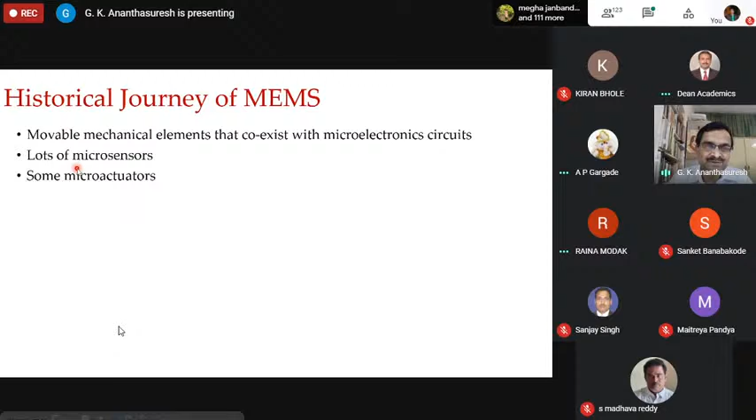Then we have actuators, micro actuators. These are not as many as microsensors. To make this point, in Microsoft Word, if you type microsensor as a single word, it doesn't complain. But type micro actuators, and it thinks it's a wrong spelling, wanting to split micro and actuators. That means micro actuators have not become as widely developed or used as microsensors.

And that's why I chose the topic of my presentation today on a micro actuator rather than a microsensor. There is also power MEMS, meaning you can generate power on the chip. So basically you can do many things on a chip today, and one of them is generating power. Also, there is this concept of metamaterials.

We all know materials - what are metamaterials? Metamaterials are those where, by design, if we control the microstructure or the hierarchical organization of a material, any single material you take can be turned into a metamaterial that has interesting properties. I'll give an example of that.

And then there is microfluidics. I'm sure you have talks on microfluidics today, as part of the course you have now. People talk about lab on a chip - the entire lab can be on a chip, and that is now well done. There are journals of this name and lots of work in this area.

Now people are actually talking about medical applications where you can have organ on a chip - lung cells, kidney cells, or heart cells on a chip. People also want to work on body on a chip now. Not that we'll have a human body on a chip, but all kinds of cells of the human body can be put on a chip so that we can actually create a body in a chip. So MEMS is not just mechanical and electronics today - there is so much of the other fields; you can do body on a chip.

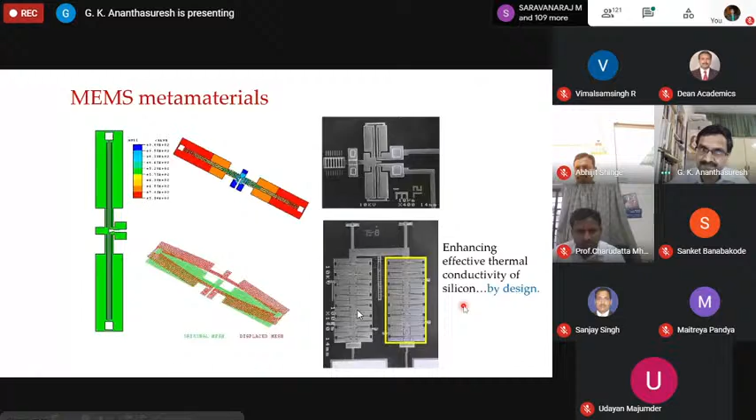Many material properties can be changed by design. And that's what a metamaterial is. You can take any single material and you can get properties of equivalent materials that are different from the base material just because of how you design the arrangement. And we also developed a lot of tools for probing biological cells. What you see here is actually a breast cancer cell, an MCF7 cell, which will be about 10-15 microns in diameter, and is being held with a micro gripper, as you can see.

This is an SU8 micro gripper, SU8 polymer. There's a glass pipette just to position it. And this one can actually grasp the cell, a single cell. And we do these measurements on single cells to assess various biological effects as well as disease states. And what you see in the bottom here is actually a zebrafish embryo being squeezed and released. We can measure viscoelastic behavior of the cells as well, static, viscoelastic and dynamic, all that we can do in a single cell.

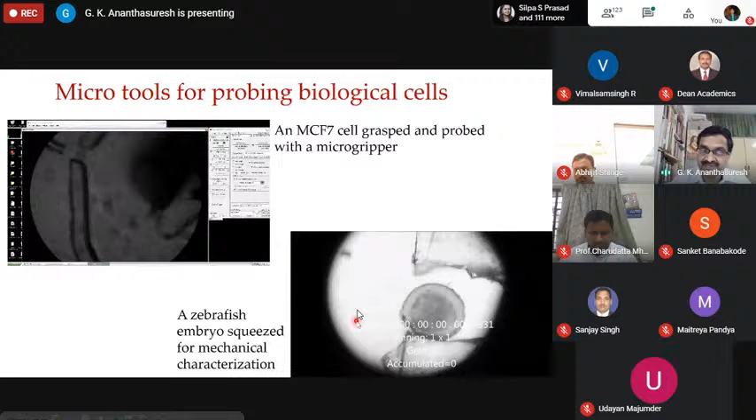And then we have also now these micro robots. Micro robots are not anything fancy. You just have a few appropriately shaped devices. Again, we are using SU8 polymer, and these are free floating ones. What you see here are the cells. These are fibroblasts. And these can be grown on these micro robots. And then this micro robot can be moved around.

What you see here are the coils, electromagnet coils. Electromagnetic force is also quite high compared to electrostatic force. Now people are moving towards magnetic actuation of micro robots. We have this array of coils and a chip, and these are the little robots that you see, different shaped robots. One of them I'm showing here, another one here, where biological cells can be grown on them, so we can shepherd the cells where we want and do lots of things. These are the ones that go inside the body and set up a hospital inside the body.

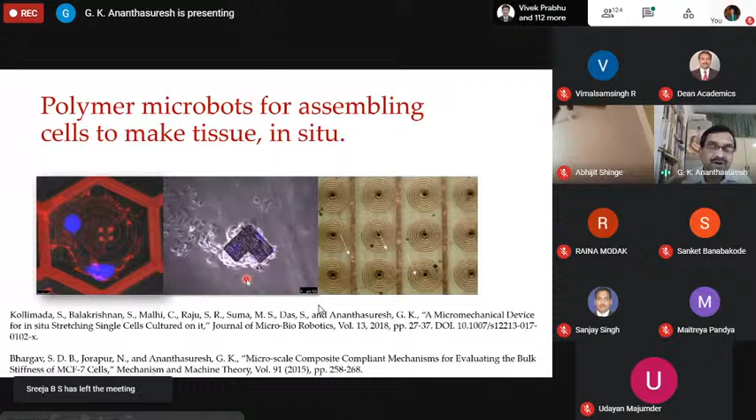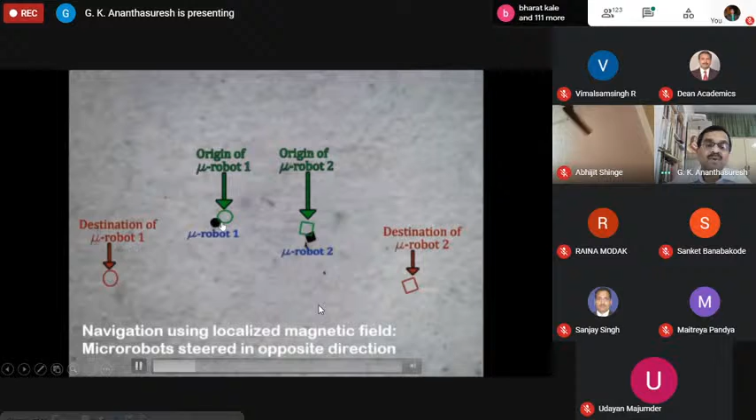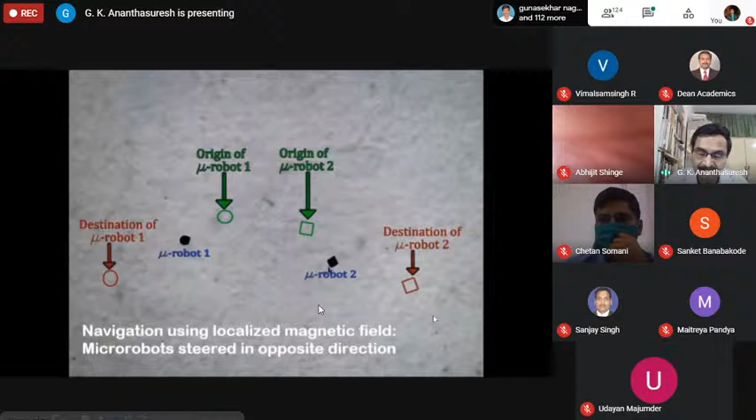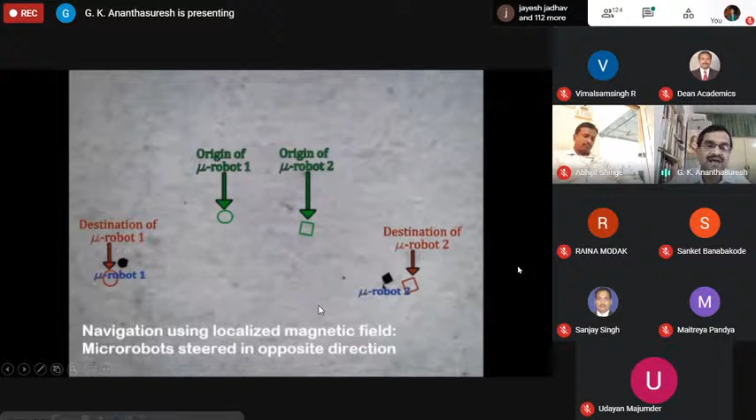And we also make what are called scaffolds for cells. Just like for a building, we have a scaffold. When you want to do tissue engineering or regenerative medicine, you provide a scaffold for the biological cells. And here we use micromechanical structures so that we can apply forces and measure forces that are being applied by the cells. Both of those we do. Our eventual goal is to assemble cells which are cultured on these micro robots and make tissue inside the body. There are applications where this is useful, and that is where we are trying to go.

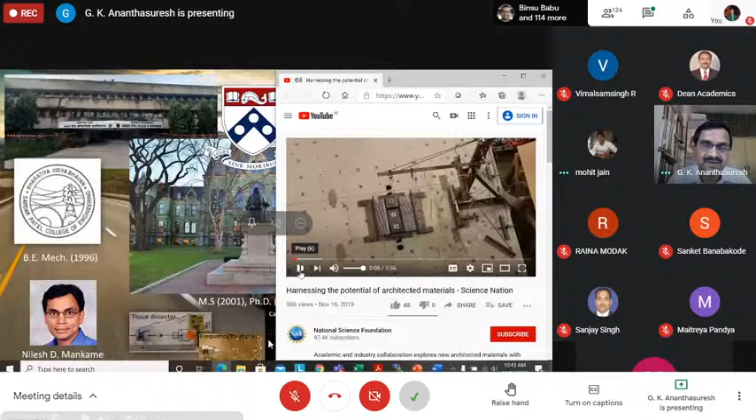Let me just go there. I hope you can tell me if you can hear the sound. Can you hear the sound from the video? No, sir. No. Okay, that doesn't come. But basically, I would like to play it, and then I will explain while it is happening.

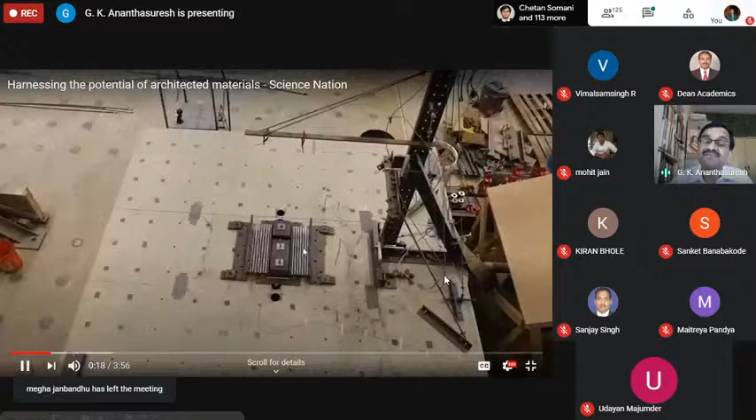So these are actually metamaterials. They're normal materials, but now you have some structure in them, and they behave differently from the original material. This is based on honeycomb structures, and this is the work of Nilesh Mankame when he was working with the professor at University of Pennsylvania. And Nilesh also will come in a minute, so you can see how he looks now. So this is Nilesh Mankame.

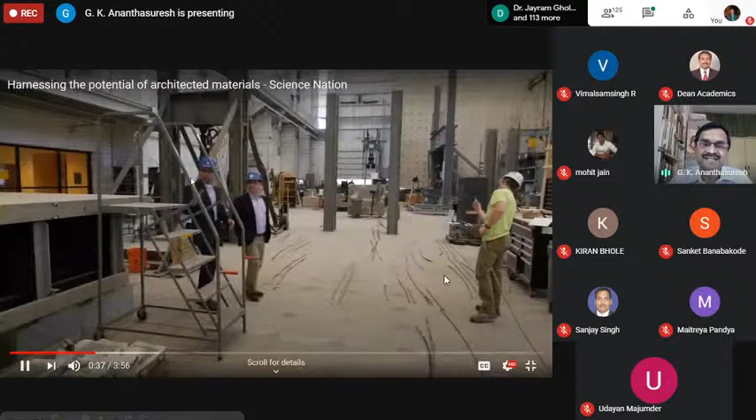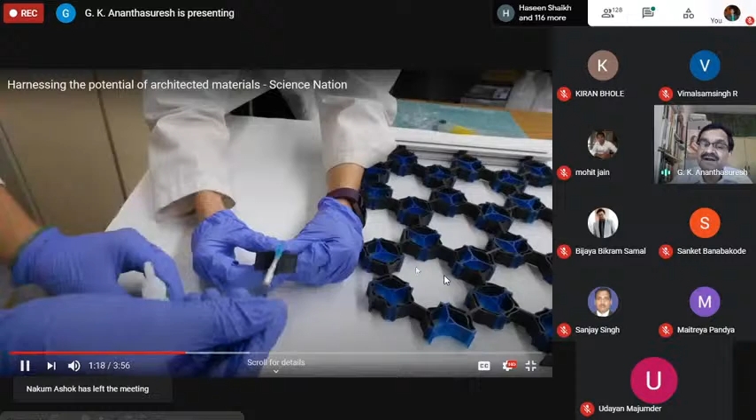So this is for energy absorption, and you can see this metamaterial when Nilesh explains. There are a lot of applications, automotive, aerospace, and this is Nilesh Mankame explaining to us what he has done with these metamaterials. So you can see the structure of these things, right? And they have different properties. Now you can do that at MEMS scale very easily and create the things that you want.

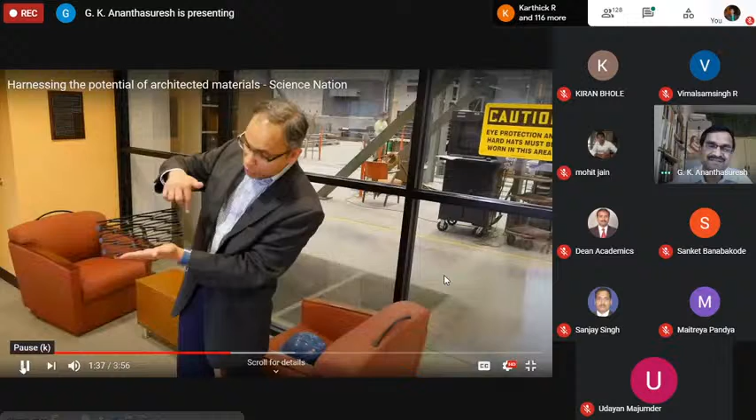So I'll stop here. Yeah, you look at that. Again, that is Nilesh Mankame. And that is bistable, you see? He presses it, and then that goes to the other state. He presses it again. Yeah, that stays there, right? So let me stop it here and go back to my presentation.

So if there are students, I think we should be inspired by what Dr. Nilesh Mankame has accomplished. And there are many more things that he has done. Now, let me move ahead and explain the last bit that Nilesh showed, which is this bistability. As you can see, bistability is all around us, in a hair clip, binder clip, some bottle caps and eyeglass frames; everywhere we have bistable things. And you can use them at MEMS scale, which is what we have done. That's why I chose this.

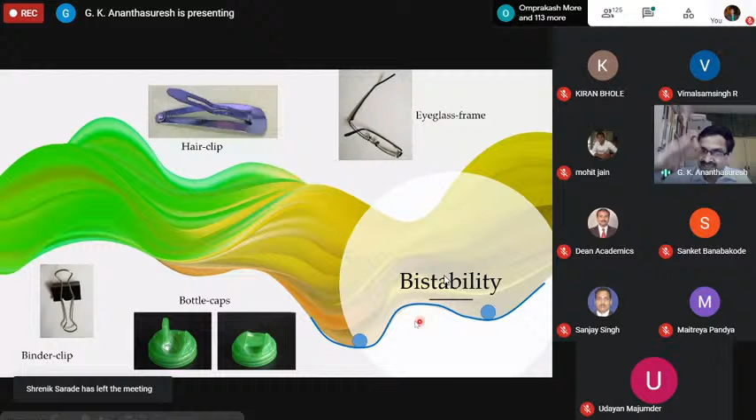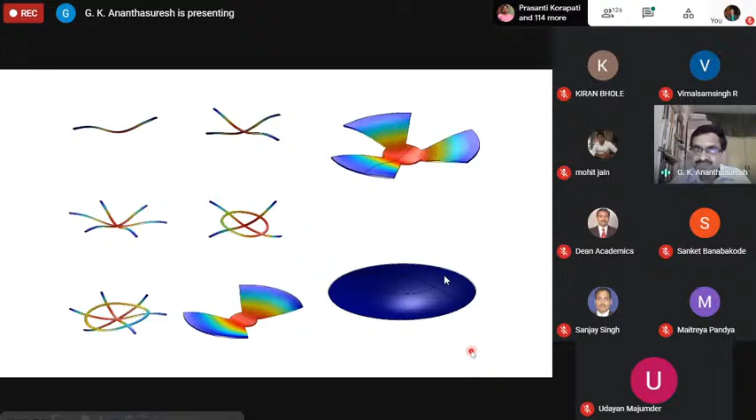And what is bistability? If you look at the energy landscape, like it is shown here, if there is a minimum here, there are two stable states. If this is potential energy or free energy, in between there is a maximum, which is an unstable state. And that's what Nilesh was showing with his hands when he presses. Now, here are various ways. You have bistable arches, a single arch, two arches, three arches, and then a ring, and something else, and the shells also. So you can use this bistability, which is highly nonlinear behavior, to do useful things.

And just to look at what is bistability, I said energy has two valleys and a hill in between. This is potential energy. If I take the derivative of this, then you get the force, right? Wherever this is minimum, force will be 0. At the maximum also, force is 0. At the minimum, again, force is 0. In between, you get this kind of behavior. As the displacement increases, force goes up and comes down. Whenever force-displacement has a negative slope, that is an indication of either snap-through or bistability.

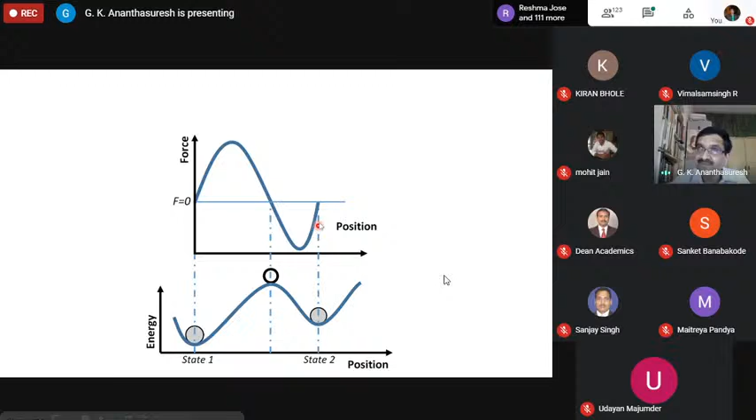Snap-through: we are pushing, and it itself goes farther. You don't have to do anything. That is the negative spring, so to speak. Positive slope is a positive spring, negative slope is a negative spring. That is, we are pushing, and it will not resist your push, but go in the same direction. That's what happens in between, and then it goes negative sometimes, and then comes back to the 0 position. And this is the nature of bistable structures.

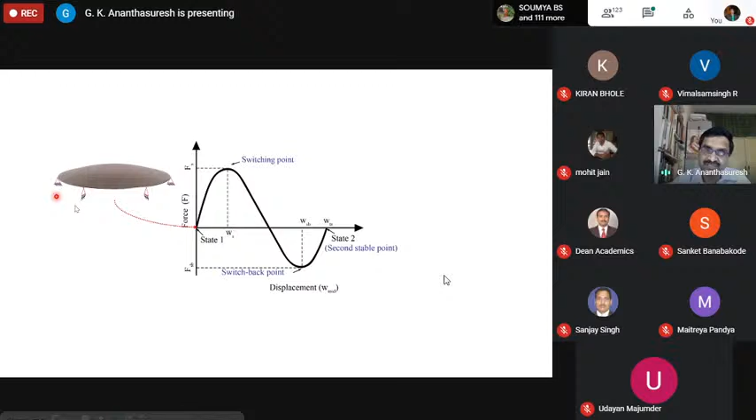And just to illustrate, you're starting here. Let's say I take a circular shell which is hinged at the edge. As you start applying force, there'll be a point where it starts deforming. There'll be a switching point. After that, even if you push, it won't stay with you. It will go by itself. That is, it enters the negative stiffness region here. And this is the negative stiffness. You are doing that, and it just wants to go.

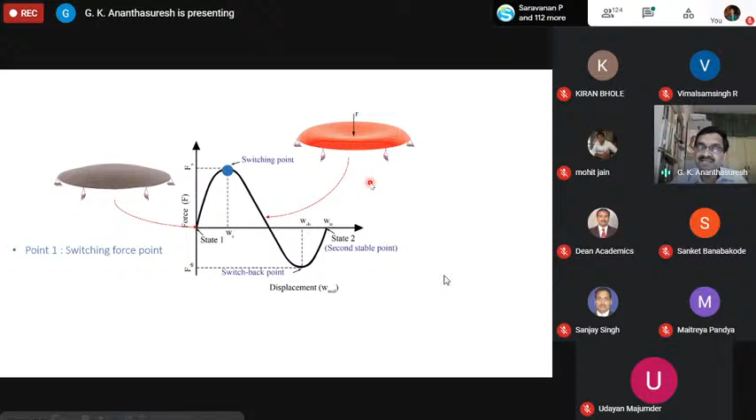Everybody has experience with shells. If you press, it'll resist. And after a while, it will go by itself to the other state. And that's what happens at the other switchback point when you're coming back. And what was concave up becomes concave down. That is the bistability.

And there are a lot of parameters. What is the switching force? What is the switchback force? How much does it travel from here to there? What is this force? What is this force? All of those. And where does it actually become unstable? All these are parameters you can control in designing these bistable elements, either arches or shells.

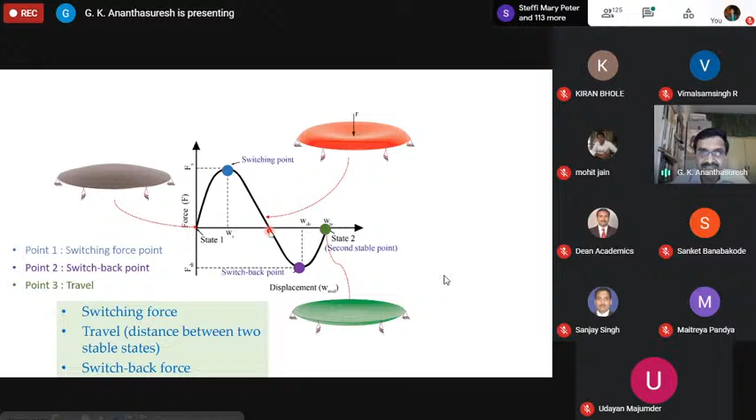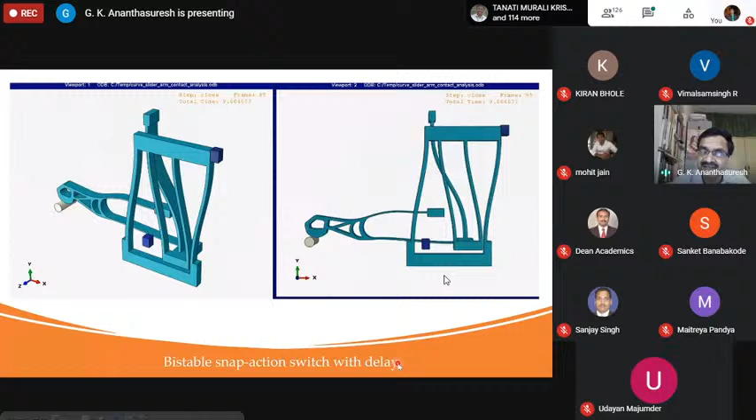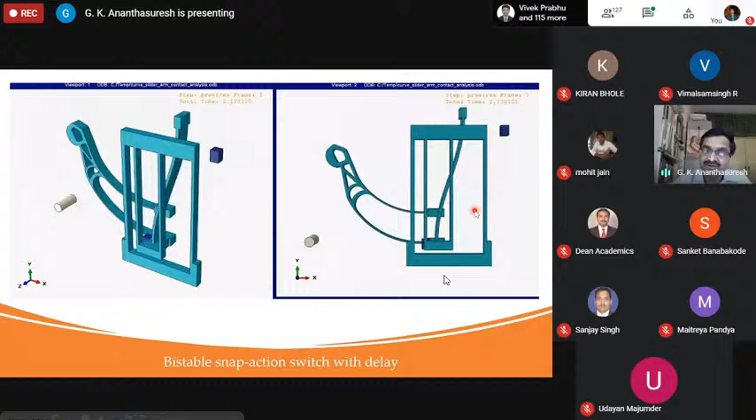So mechanically, you can create a delay and create very unusual nonlinear behavior for these things. This is an MCB, miniature circuit breaker, but just an example of what can be done with what we call compliant mechanisms. They don't have joints. Everything is elastically flexible. It is strong. You don't have to worry about things breaking because we keep the stress low enough in these designs. So now let me come to the electrothermal bistable switch that I would like to describe to you.

A little background. Where do we need this? In terms of microactuators, RF switches are something that are very widely researched, and there's a lot of work that's going on. And in fact, their performance is actually meeting the requirement that they'll be commercially used as well. In fact, some of them are already used in some devices. So here you need switching speed to be very quick and frequent.

If that is the case, using thermal actuation might not be good. Then you need electrostatic, which can go to gigahertz frequency of operation. But then force will not be much to make a good contact with the switch. If it is milliseconds or slower, you can use electrothermal. And there are usually cantilever type of switches. If you have an electrostatic actuator, let's say, it attracts and it will come and close the switch.

But then we thought that there will be some applications. In fact, there is redundancy selection in antennas where your need to switch between on and off is not frequent. Only once in a while you have to do that. So if we were to actuate to keep the switch in the on position, then you are actually consuming a lot of power. So if you only need it once in a while, it's better to use the bistable design.

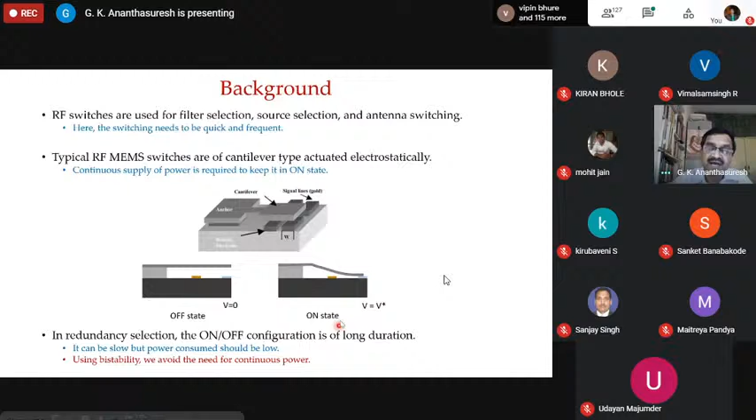That is, only to switch from one state to the other state, you need power. After that, you don't need power. So you don't need to provide power continuously. And that's a bistable switch that I'm going to talk about. So this was funded by ISRO. So these are the specifications that they had given to us, how to make this switch.

And in terms of RF behavior, I'm not a specialist. I'm a mechanical engineer. I work with people who know, Professor KJ Vinoy in IISc, also Dr. MS Giridhar at LEOS. So they do the RF modeling. And also one professor from Madurai, Professor Kantamani, is actually doing this for her work as well. I'll come to that at the end.

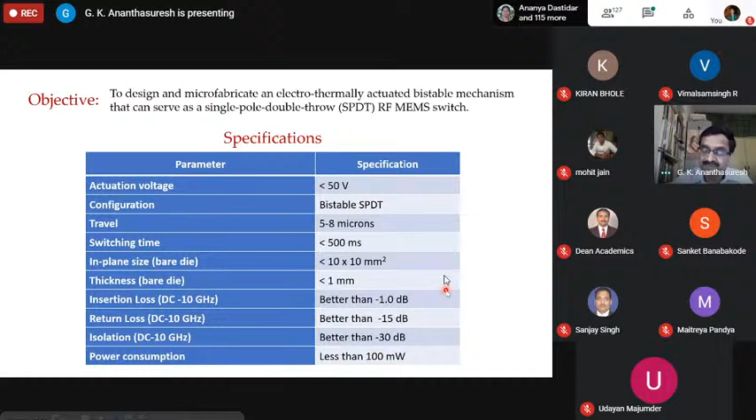So what we'd like to do is actually focus on the design now. It's bistable, also bimodal. I'll explain what that means. And then how to integrate the electrothermal actuators, and fabrication. I'm not going to go into details because fabrication today is accessible to everybody in a way, in India too. I'll come to that again at the very end of the talk. And then some testing that we have done. RF characterization is done only preliminarily because it's an ongoing work.

And we did a comparison of our switch with others. Most people today, when they make these switches, use electrothermal actuators because they have larger force, and there are applications where the slowness of operation is not going to come in the way. And within that, there are two types of electrothermal actuators.

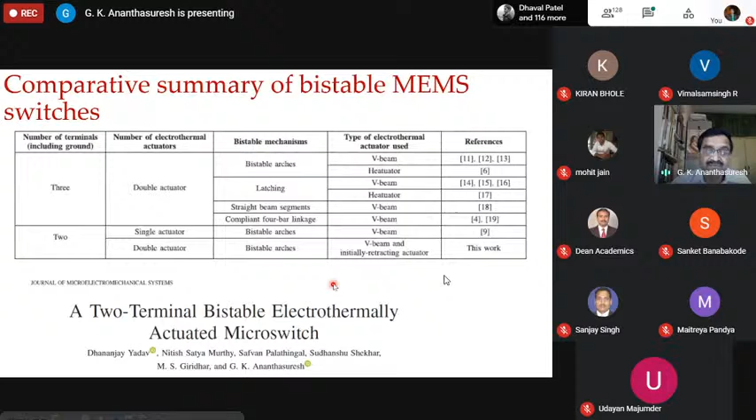One is the V-beam, the other is what is called a heatuator. The heatuator is the folded beam that I had flashed at the very beginning. The V-beam is the one that I'll be talking about a lot, so I will not explain that now. So many people use the V-beam, as it's very simple and can be very effectively integrated with the devices.

It's like those lights, when you pull a cord, they'll turn on. You pull again, it will be turned off, right? In a similar way, the same two terminals, you apply voltage, it will turn on. You apply voltage again, it will turn off. Only thing is the duration of the pulse, you need to change a little bit.

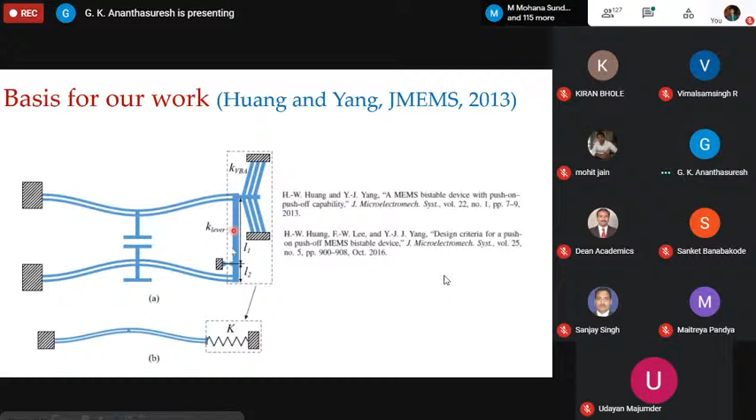It looked very interesting, but their design was very, very far from being robust. That is, when we took this design from this paper and tried to simulate it, it was just not switching. So we thought we should work on it, and the problem was this particular lever that they have was not strong enough or was not doing the intended job to make it robust to manufacturing tolerances.

We're starting with that. We used our ability to design bistable arches and came up with a design that looks like this. In the process, we had to come up with a new kind of actuator, which we called initially retracting actuator. That is, instead of just going forward like this, it will initially go back and then move forward. And there is a reason for it, as I'll explain.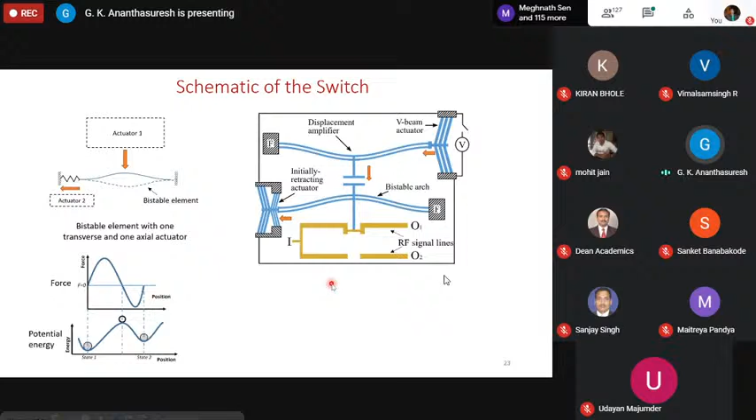So our switch design is basically you have 3 terminals, but actuator 1 and actuator 2 will have the same thing, that is ground and one potential. A normal 3 terminal would have 2 different things. Even though we have 2 actuators here, we have only 2 terminals. This and this will be at one potential, this and this will be the other potential. And that's how we do 2 terminal.

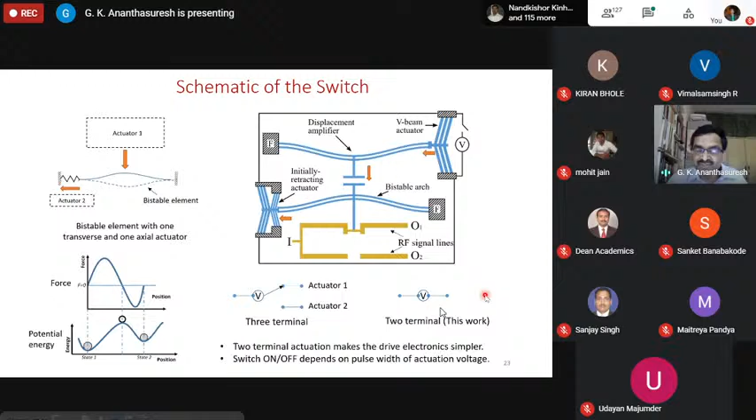It makes the power electronics circuitry easy. That's what our ISRO team, LEOS people told us, and that's why we moved ahead with 2 terminal design. How does it work? There is... use that as an amplifier. That is, displacement is small, but force is high that comes here. That will close this gap and push this arch. And that arch will go to the other state, as we'll see now.

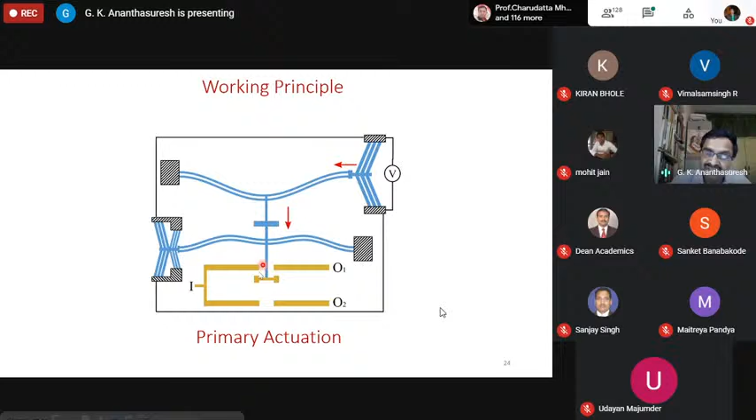So now you see, I'm applying force over here by closing this switch. Okay. Now that pushes this, and now this started pushing. So we break that RF transmission that is shown here with the dashed line. Of course, I'm showing slowly, but it will happen dynamically in the switch. The next step is this arch actually will switch, because we have designed it in such a way that when it is pushed here, because of the negative stiffness that it has, afterward it goes by itself to the other state and stays there.

Now the switch is off again, right? So watch again, I'm closing the switch, it pushes and goes, switch is off, no more power consumed, and now I'm closing another RF line. There's a switching between that line or this line. Now it stays there, okay?

Now if I want to remove it, I apply voltage, the same thing again, this one and this one. Now this starts going initially that way, retracting. So this actually comes back, and then that actually moves forward. That helps it to switch back and come this way.

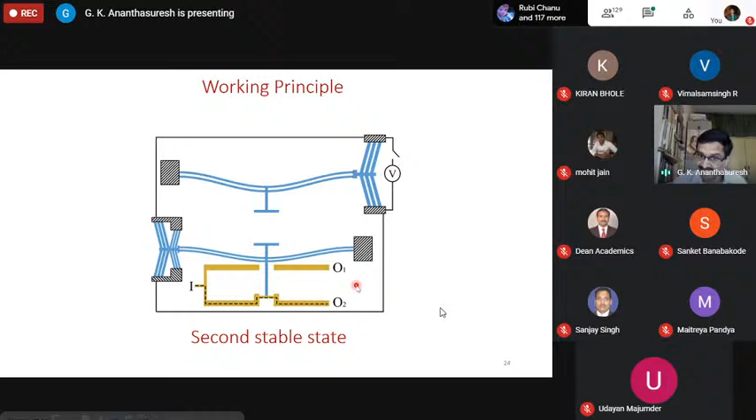Let me play this again. So initially it is here. We actuate that, it moves down and goes back, stays there. Now I apply voltage again, and then it comes back. I can switch back and forth by applying the same voltage but different durations. And how do you design this amplifying arch, this bistable arch? And there is an electrothermal actuator here, a special kind of electrothermal actuator. All of them together give you this behavior.

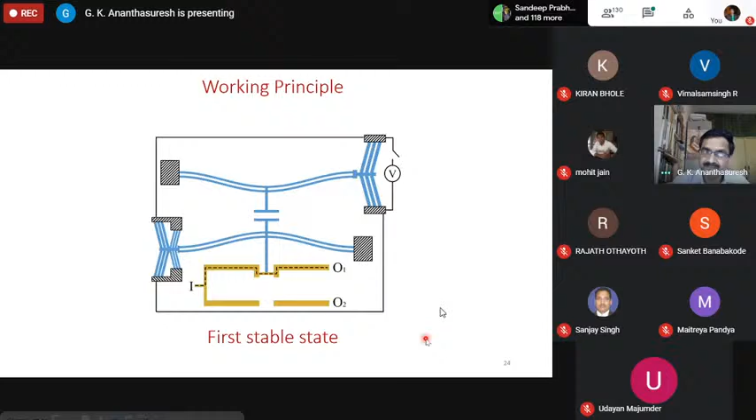So first of all, I said we need a new kind of actuator here. There is this heatuator, as I called it before. It can be a V-beam actuator. The V is this way, a sleeping V. This is a heatuator. So when we want to switch it from here to there, this one should not move in this direction. When it moves in this direction, this will not be able to switch to the other side. Okay.

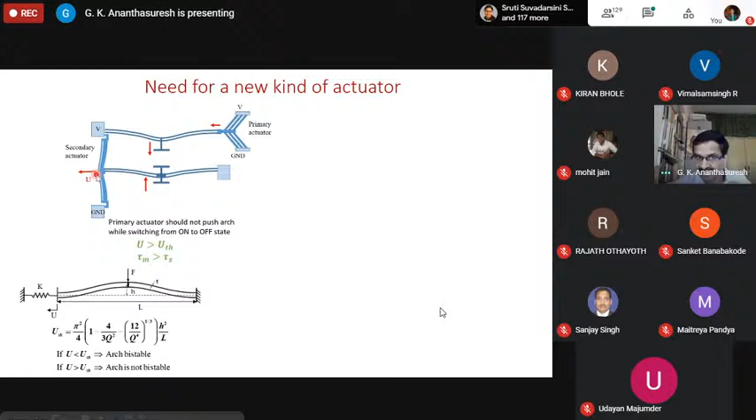On the other hand, when it is already there, you want it to actually go that side a little bit initially so that you can pull it back to this side. So we need an actuator that moves back and then comes forward, all in one thing. And that's what I think we have been able to do here.

So normally this heatuator, when you apply voltage between these two, you bend that way. Similarly, if you have a V-beam actuator, when this is at potential V and this is at ground potential, current will go through, causing ohmic heating to expand. This point will go that way.

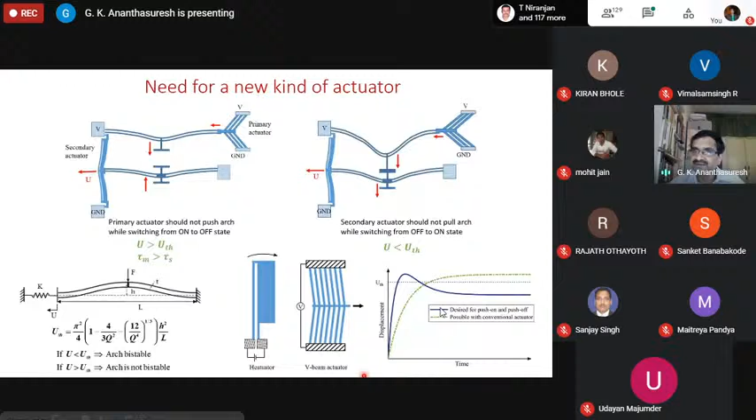Now what we want is something that goes in one direction and then comes back, goes back and comes forward. That's the behavior we want over here, and we try to do that. In other words, as time goes, it's a dynamic behavior, initially retracting.

So this one goes that side, whereas this one, because of the angle of this V-beam, moves this side. But then this is shorter compared to this, the length of these individual elements in the V-beam actuator. So there is less resistance for this, and current actually goes through this and it heats up faster than this in terms of response. That's why initially this will go that way.

But afterward, the force in these things is much higher than the force in this. It will start going that way. That is, initially it will go down. This is the displacement, this is the time. Initially it goes down and then catches up and then goes forward.

Or we can design them in such a way that it can go back and then come forward and not go beyond the original state, or can go back and come a little bit and still stay back, right? So these things, initially at t equal to 0, if it is here, up to some tau in between, it will actually go back, as you can see here.

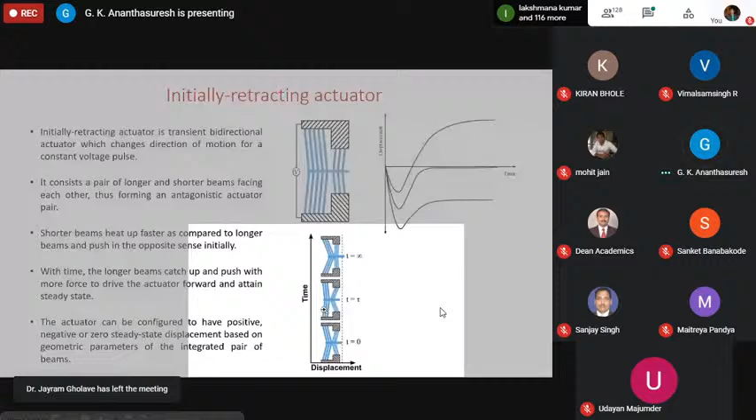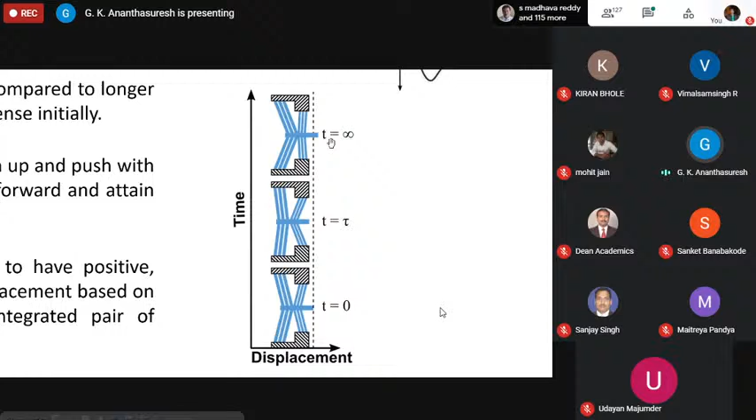Yeah, see, initially it is here. When I just actuate, in that dynamic time, it's only a few milliseconds, it actually comes back. And then you continue, it actually goes forward. This is what we call an initially retracting actuator, and that's what we need for our design so that this bistable switch can go back and forth.

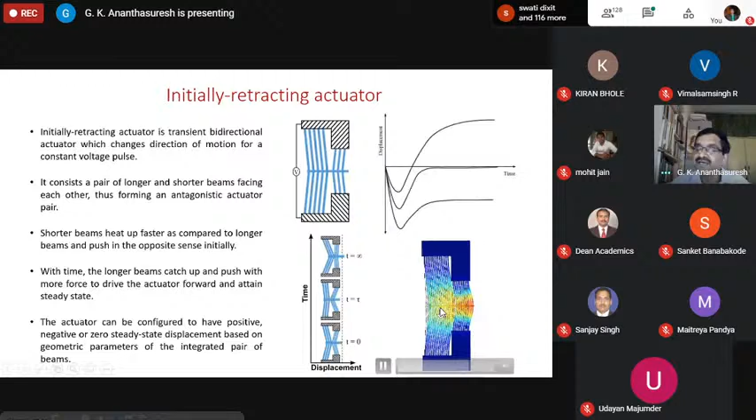And you can see this, how it happens, if I play this video - it's a simulation. See, initially it goes there and then comes forward. I'll play it again - initially it goes to the left and then moves to the right. It's all in the design; we're not doing anything complicated with control here.

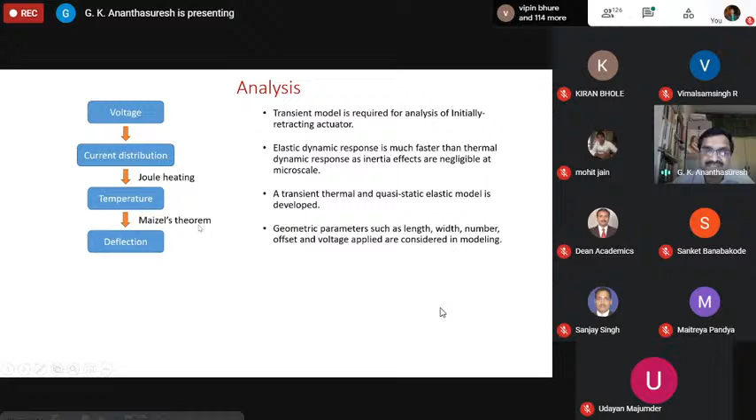So here we need to do electrical analysis, then the thermal analysis, and then finally the elastic analysis, for which you use this Maizel's theorem. Again, it's Nilesh Mankame's work that he had done.

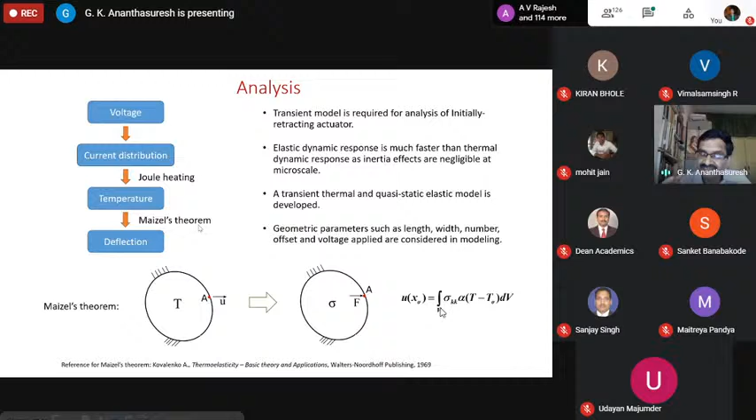So now we work on what we call topology optimization to design these things. We can do that, but then in a practical application, we want to keep the geometry simple enough. So in this case, we went to just the bent beam actuator and did analytical modeling of that.

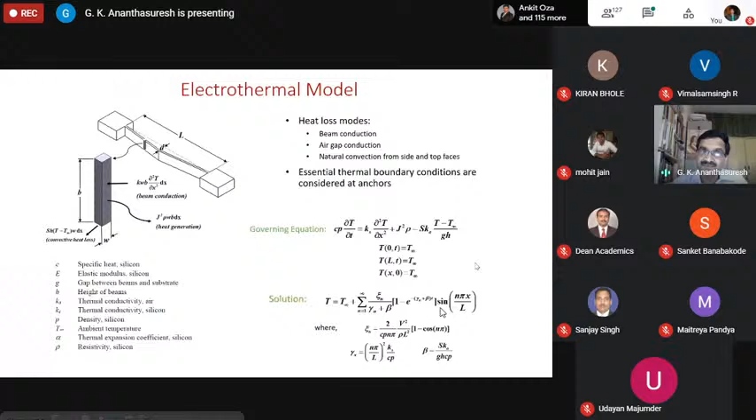And try to get, if we apply a certain potential between these two ends of the V-beam, how much does it move, what is the temperature profile and all of that. It's highly nonlinear because we have electrical analysis first, then the thermal analysis by taking joule heating, taking temperature loads, we have the elastic analysis. But everything can be done analytically - we can track this using Fourier.

I think there is some noise somewhere. Maybe somebody has to mute the mic.

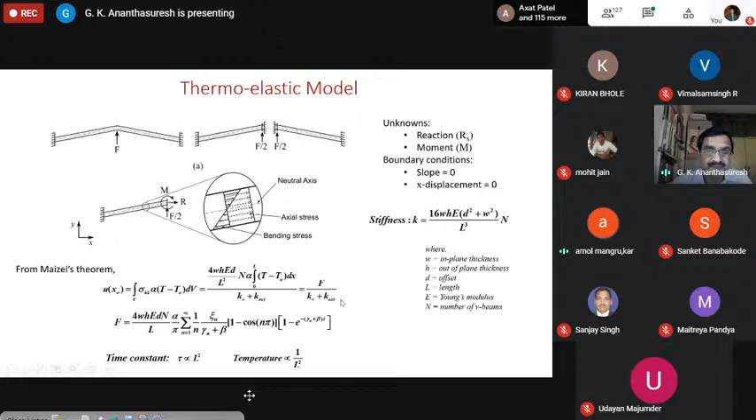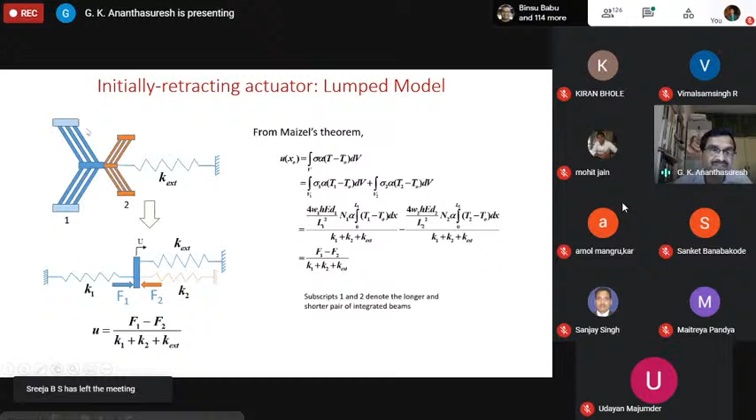Okay, so we can get this displacement analytically and try to design how many of these beams are needed, what should be their stiffness, and what should be the width, and what is the length of this versus length of this, and so forth. We can do everything analytically and get the appropriate things.

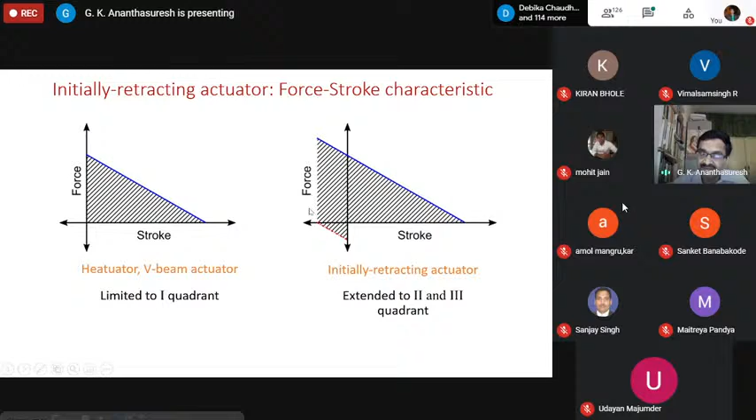And here again, normal actuators - force, zero displacement - it will go down like this, at least in the linear regime. Whereas here, it initially goes there, that is the negative part, and then from there it comes forward. So this is how the energy will be in this initially retracting actuator. We also pay attention to the energy, modeling this whole thing as one spring to design this, or making this the spring to design the arches - lumped modeling basically. We do that so that we can design the actuators and the mechanism together.

A lot of analysis and optimization here, where we would like to make sure it has that snap-through or bistable behavior. So the entire structure is now modeled, whereas in the previous one we had modeled the actuator like a spring, here we are modeling the entire structure as a spring, to see at what stiffness this will demonstrate the bistable behavior.

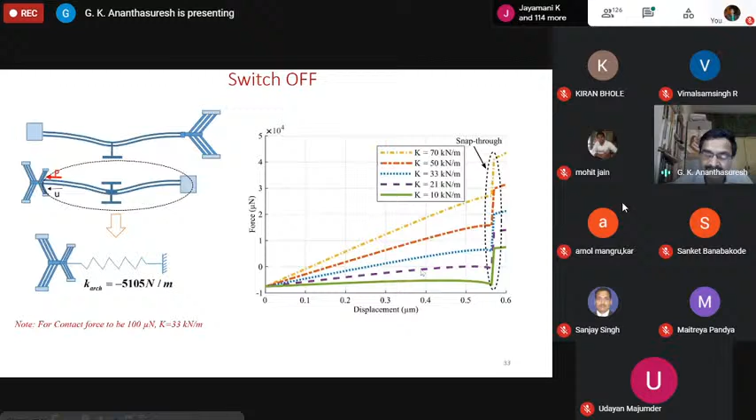All that can be done analytically, and we can of course do finite element analysis, but for design, doing it analytically always makes more sense. With the initially retracting actuator, we have to time it - what is that tau where it goes one direction and then starts coming back to the other? Tau also has to be designed properly, and we put that to 1 millisecond, and the threshold displacement to the left and right, we minimize the power required, because that is a requirement from ISRO's specification - it should consume as little power as possible to switch, even though it's intermittent. Even then they want the power to be low.

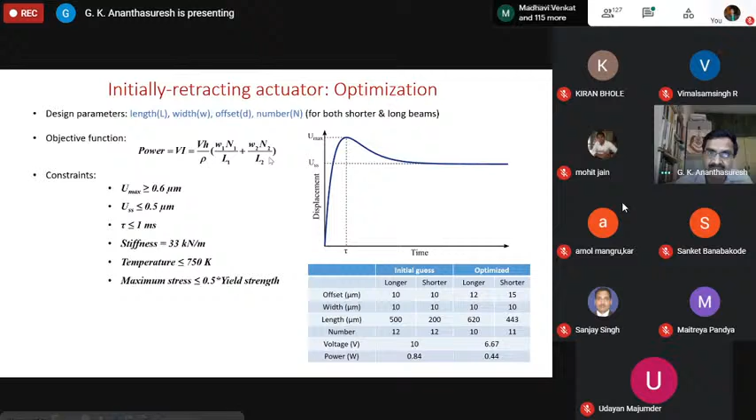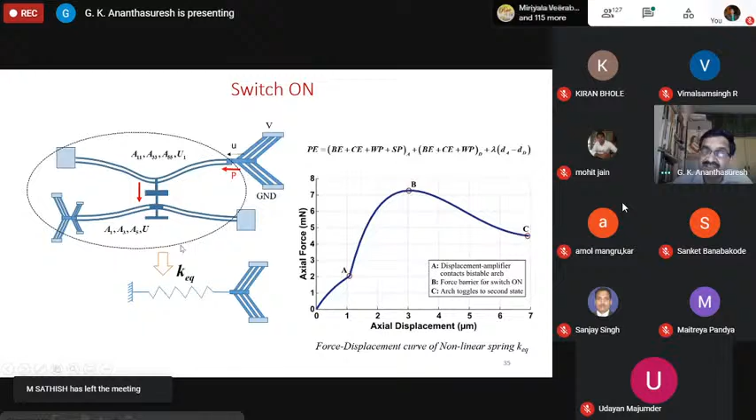We did all of those calculations and tried to look at the behavior analytically by looking at various energies that we have here, and what exactly happens to the force displacement curve of the nonlinear spring, that is this entire structure. As you can see, initially itself it is nonlinear, suddenly it switches because it contacts the other one, goes to some level to switch it, and then it actually snaps back, this entire structure. So we can design this behavior the way we want.

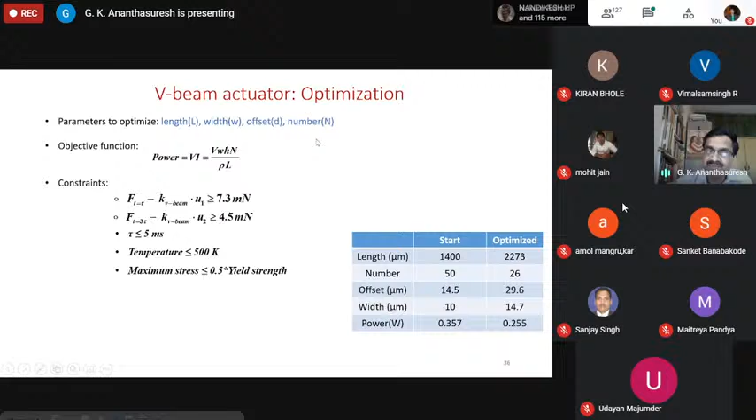We also did optimization with various parameters - length of the beam, width, and the offset between the amplifying arch and the bistable arch, and number of beams and so forth. This is a simulation where you can see when I'm actuating now.

Previously it was just a rendering, right? Now it is actually simulation. I'll play it again. So it's now coming back slowly. Okay, let me play from the beginning. We actuate, it comes down, and then it loses contact, the top one goes back. Now we have removed the power, it will stay there. This is off to on.

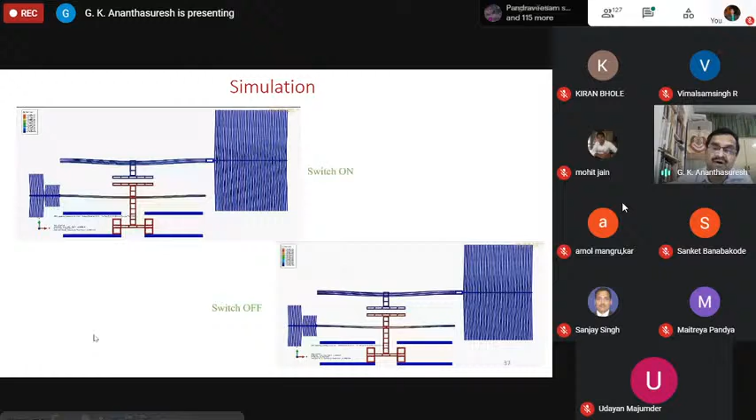Once it is here, I can apply voltage again between the same two terminals. If I do this now, it's going to switch back. So now it is slowly going, and then went there and then switches. This slowly moving is important because it moves slowly and then picks up speed and snaps. Otherwise, you don't make a good contact, and that's what it is.

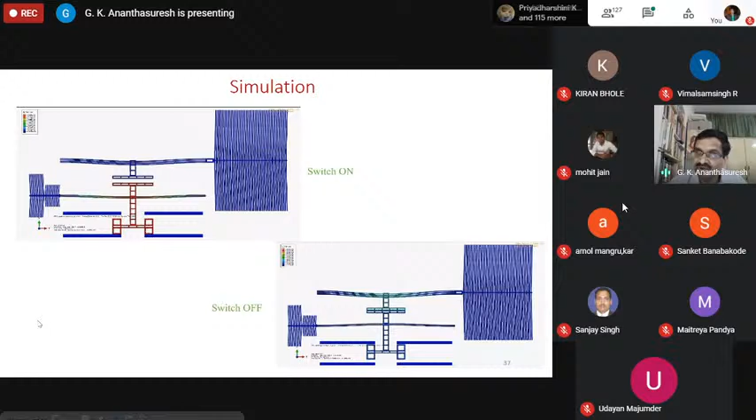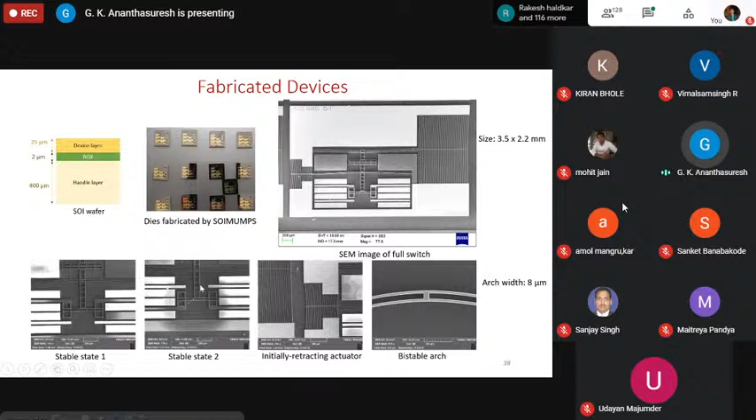We can get a number of these devices and do the testing. Now this is a video of the real device where you can see this is the RF transmission line from here to there, and then there's another one. This portion from there it will switch back - just watch. This is a big probe, and this is another probe. Only two terminals - one terminal, another terminal, and that's what we are doing.

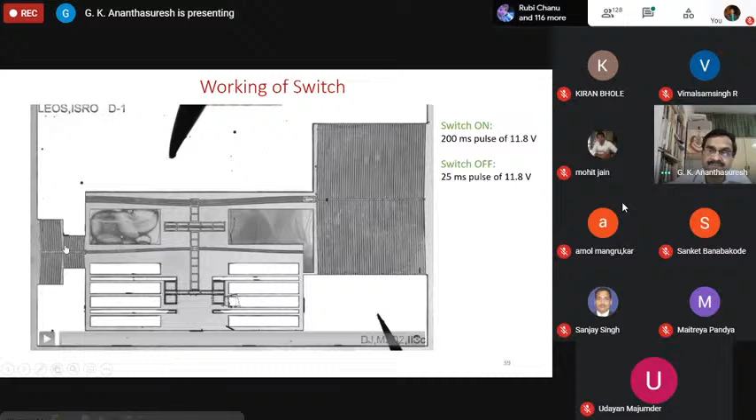The big electrothermal actuator, and then these are the array of amplifying arches, and then there is this bistable arch, this initially retracting actuator. We apply this for 200 milliseconds - in this particular video, 11.8 volts. This is 25 milliseconds to switch off - it requires much less, same voltage, but for much shorter duration, it will switch back. I'll play this - this is a real device. Now it's switched there. Then we apply for 25 milliseconds, and it's going to switch back.

It comes back to the original position. This demonstrates that this concept actually works and is quite reliable. Once it is in the switch state, it will stay there until you apply voltage. So small vibration, anything, will not switch it. That was the problem with the paper I had talked about earlier.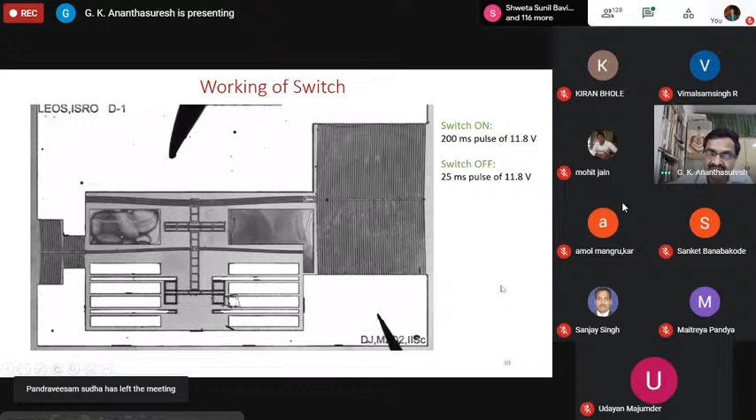This is an electrothermal actuator. It gets hot, so that temperature can actually be visualized using IR imaging. And then we compared our analytical model. It predicted maximum temperature to be 80, whereas measured was 78.

And the initially retracting actuator, this gets hotter sooner, the shorter one compared to the longer one. Here measured was 148, analytical model said 153. So it's pretty close. There could be error in the measurement itself, or with properties we don't know. But again, we wanted to make sure that our modeling is correct.

And then there is this dynamic response that we need to measure. This is done with laser Doppler vibrometer. I see Professor Suhas Mohite there, our IISc PhD student. Suhas has done some wonderful work on MEMS here, so he knows about this laser Doppler vibrometer. This is a much newer one, Suhas, compared to the one that you had used.

Now we have a nano center where we have all this setup. We can actually measure this displacement dynamically, in fact much faster than milliseconds, but this one has millisecond behavior. So we have the analytical one, there is finite element analysis, and the measured. They're not perfectly agreeing, right? Because there are a lot of uncertainties in this.

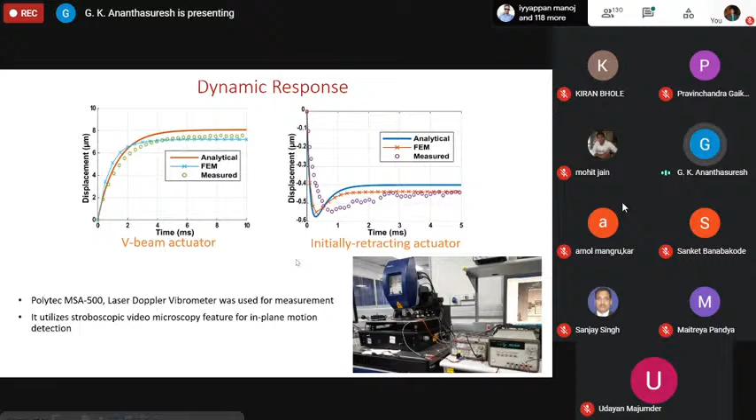One of the things is we do not consider convection, because convection modeling is quite difficult. We can do it - that's what Nilesh Mankame had done long time ago. But when you're designing, getting all that complicates matters. We do this, and then we measure it, and then see what the problem is.

One of the things that we had seen was a very subtle thing: when you are modeling these individual actuators, there is some heat that goes from one to the other. Even though they're identical, there's a little bit of heat exchange, especially in our initially retracting actuator between the shorter beams and longer beams. It goes back and forth. Initially that gets hot, it responds faster than the longer one, so heat from here goes there. Later heat from here goes to this as it heats up. So we need to consider that also in our analytical modeling, and that's what is being done right now.

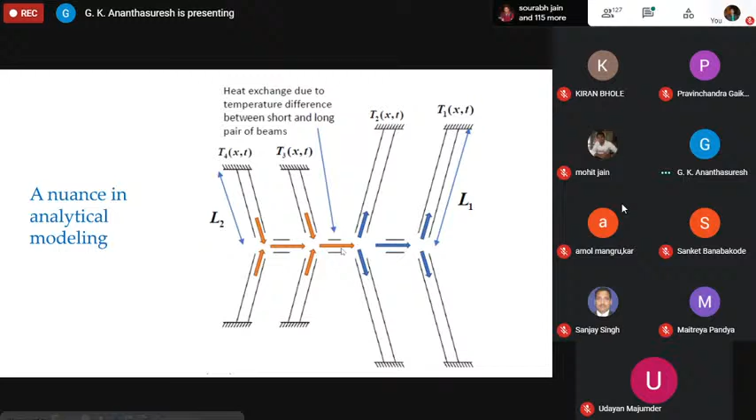And the next thing is RF characterization. There are a lot of requirements for this - insertion loss, isolation, and other things that you need - and that was not really good. One of the reasons was that ours is a planar actuator, not an out-of-plane actuator. With an out-of-plane actuator, you have a proper metal coating on it, top and bottom, so you can switch. Whereas here, what we have are these sidewall contacts.

This particular one comes in contact, so we will need to have sidewall coating. We have done that by sputtering in our nano fab here, but that's one of the reasons why it is not behaving as well as it should for the RF performance. Mechanically, it has no problem - it switches. Now we need to get the fabrication so that sidewall coverage can be properly done.

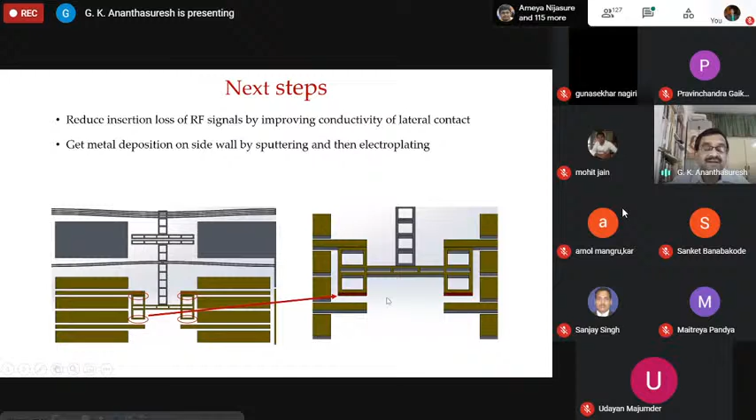Professor Kanthamani, who is in the ECE department at Thiagaraja College of Engineering, Madurai, is under this program - a faculty development program. I want to tell all of you that SERB, Science and Engineering Research Board, has this program that many of you might be aware of called Teachers Associateship for Research Excellence. So Professor Kanthamani applied for it and got this.

This is an excellent opportunity for college teachers where you can propose a topic and come and work in places like IISc or IITs where there are good facilities, so that you can actually stay there. They pay for everything - they actually give you a monthly slight increase in salary, 5,000 rupees or something, and then consumables money, and then travel and everything for coming.

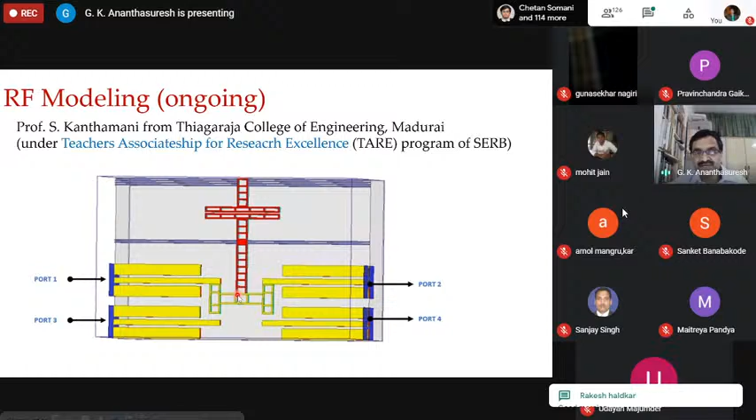And working at an institution - because Kanthamani is actually doing modeling, RF modeling. Since I'm a mechanical engineer, I need somebody who can do this. She's actually doing the HFSS software to see how to compute the insertion loss and isolation and other things that you need for RF performance, the S parameters, and that's what she's doing.

Now I would like to actually take some time to talk about how all of you can do MEMS research. Suhas Mohite did his PhD here on a QIP program, and some of you might be doing already. But after you go back, you don't have to worry that you don't have a MEMS fabrication facility or don't have these tools or anything. I think it can be done today.

Software is available in various places, and you can write your own codes as well. And when it comes to fabrication, I would like to talk about a community chip that we run. There is a professional society called Institute of Smart Structures and Systems, called ISSS. And there are some foundation courses. I just finished one MEMS design course, and there was another course on IoT, and then there was a biosensors course. There are a lot of courses that ISSS offers.

These are all now online. They used to be in person. Now they're all online. And this community chip is something where several colleges come together. In fact, we have done it already 4 times. Colleges come together and they share a 1 centimeter square chip. That's why it's a community. Everybody shares that little 1 centimeter square. You don't need a whole lot of space. In fact, if you have 100 by 100 microns, you can actually do some devices, right?